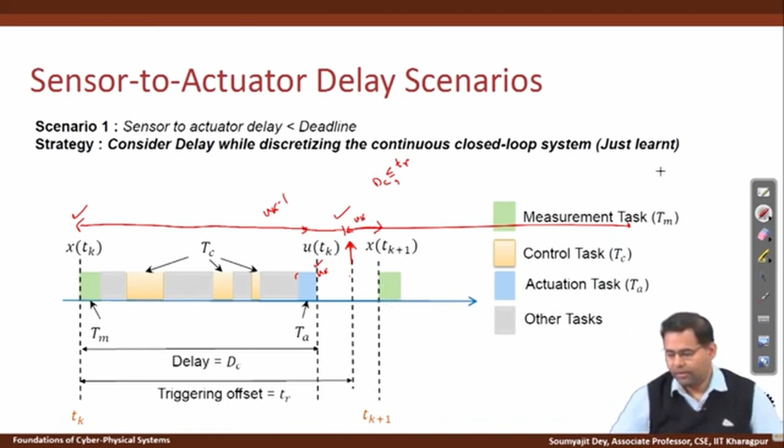Now the question that comes is, what about the other scenario, that is, the sensor to actuation delay that we finally suffer is greater than this deadline. So that means the actuator is supposed to sample the updated control right at this point, where the triggering will happen, right. So the actuator is supposed to sample the updated control, but that's not really available,

because let's say due to delay in the control task or the actuation task, the final update on the control happens here, which is beyond the triggering of the actuator, right. So that means in this case the entire control command updation task is missing its deadline.

So it can happen in various possible ways: that it has been preempted too many times and then it was delayed, and then the actuation task also needs to happen within the deadline. So all these things could not be completed, and before that the actuator actually tried to sample the update, if there is any, on the control task with this offset.

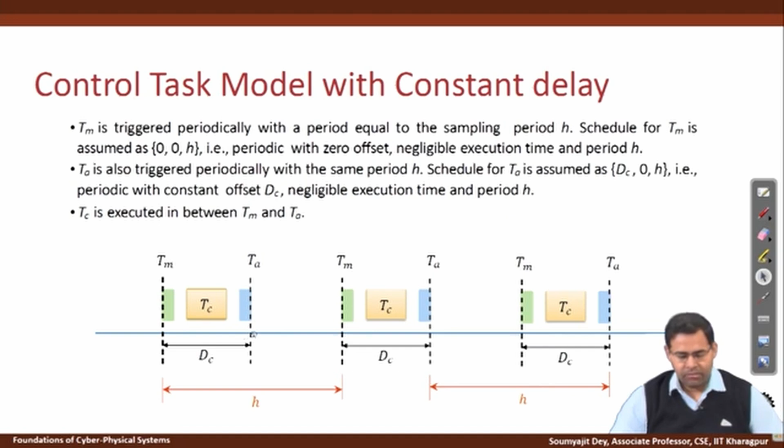So just recalling from our previous picture, this is what we had: here is a measurement, then there is a task actuation happening here, then again measurement and actuation happening here. It is supposed to be like this, and this delay is kept below the triggering interval, but if this delay goes beyond that interval, then what situation will happen? That is what we are talking about here.

So let's understand. This is where the actuator is trying to sample if there is any update on the control, but the overall sensing to actuation delay in this case, due to task preemption or extra computation or data communication delay between the actuator and the controller, or the controller and the bus, there were some delays, due to which this computation got delayed and it was completed beyond this triggering offset. That simply means the actuator is unable to get this update.

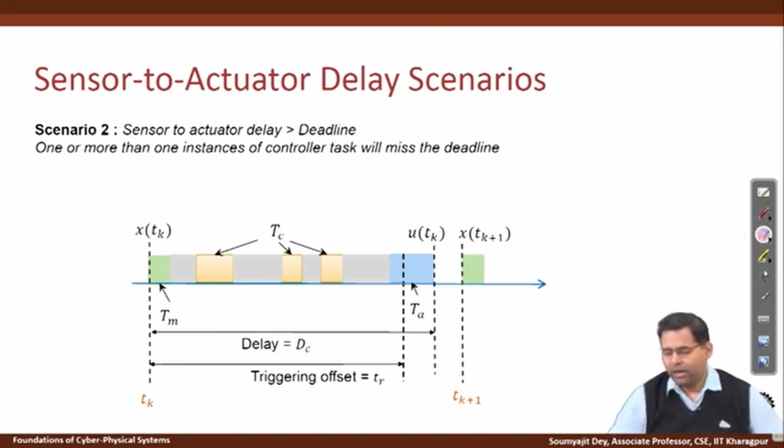So what happens in this scenario? The actuator needs to continue with the older control update only. So you need to have some strategies for what to do here. One strategy is that you kill the control task that is going to miss the deadline. That means the control task execution is here, and it's still not finishing, and the actuator is expecting the update to be here, but the update is still not computed. So right here, when the system observes that there is no update, it can kill the control task execution at that point, and it can just continue with the older value.

And there is also another strategy which is called delayed control, where you can actually delay the actuation itself, but that will depend on the physics, that means how the system is really implemented, whether the actuator is actually allowed to delay updating the control from the task.

So in very simple systems, the actuator simply doesn't wait, because it will be working with a fixed period h, and it will be working with this offset tr. So every time at a fixed period, it is going to sample and figure out whether there is any control update or not, and if there is no update, it will simply continue with the older control update, and the current control task execution will simply be dropped. So that's a kill job strategy.

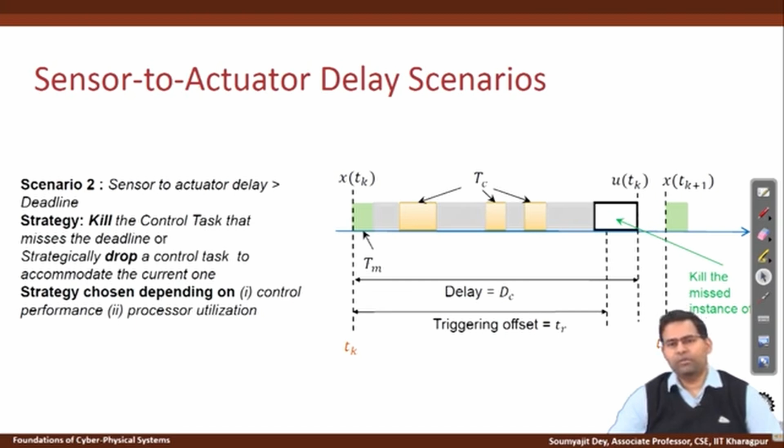So the strategy to be chosen will depend on the performance of the system, how good the control loop is performing with respect to its current sampling and plant model, stability requirement, etc., and also the amount of processor utilization. So as an example, let's consider a situation. We will see how this kill job strategy can affect the control task execution.

So suppose you have two control tasks, T1 and T2, running on a single processor with these periodicities as given. T1 has 0.4, T2 has 0.6, so T1 will have a higher priority, and let's say there is also an authentication task which will always be running with a much smaller periodicity, 0.3, and it is trying to secure the system, basically monitoring the values. And since this has a smaller period, it will run more frequently.

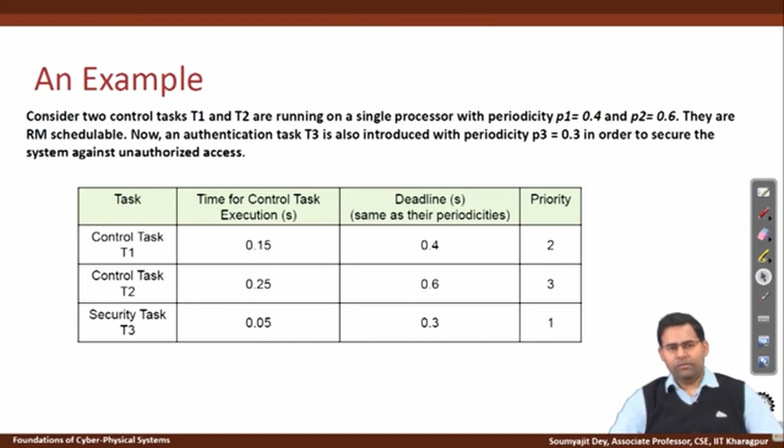Now let's consider that we are looking at RM scheduling. That would mean the priorities will be in the order of frequency of the tasks. The smaller the periodicity, the higher the priority, so this will be the priority order: the security task will have the highest priority, then control task 1, then control task 2. Observe that this task set won't be RM schedulable. To understand why, let's look at the schedule here. Okay.

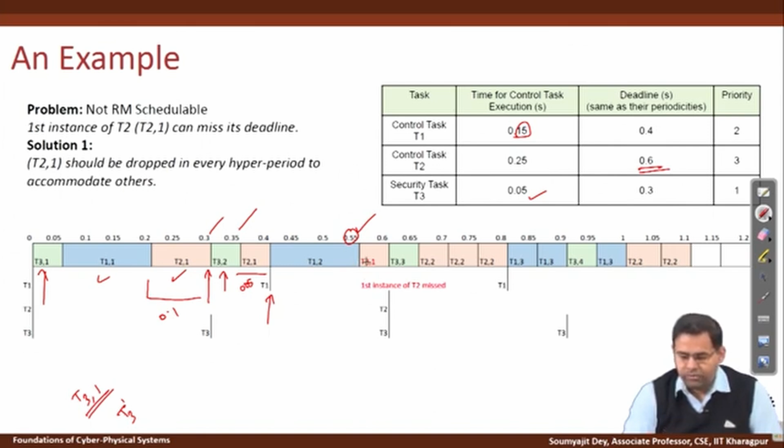So in this time T1's second instance will arrive. So T1's second instance will now fully occupy the CPU for 0.15 seconds. Okay. So it will end somewhere. So T1 second instance starts here, and it is going to take 0.15 seconds, and so it starts at 0.4 and it will end at 0.55. Okay. So then again T2 second instance can start, right, and now T2's second instance will take this much amount of time, and T2's second instance will finish, right.

But if you see for T2, when is it supposed to come again? Here its period and deadline are both 0.6, right. So here T2's second instance is coming, and T3's third instance is coming, right. But could T2's first instance finish? Let's calculate the execution time. Here it was 0.1. So in total we have 0.2 of the job done, but in total it needed 0.25, right. So it doesn't finish. So that means before it finishes it will again be preempted, and by now the deadline is also over, right. So then T2's first instance is going to miss the deadline right here, right.

So fine, then T2's second instance has come and T3's third instance has come, right. So let's say third instance will have a higher priority, and we will execute it right here, and then we will continue with T2's second instance. So first instance has already missed its deadline, no point in continuing with it, right. So T2's second instance continues here, and then T1's third instance is going to come.

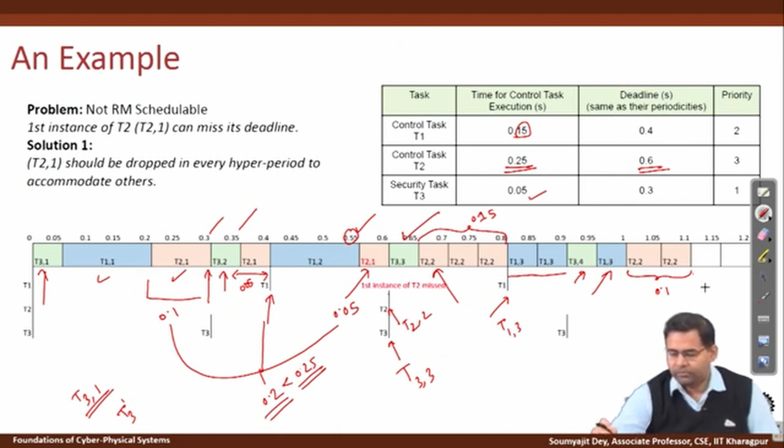So if you see in this period, we have actually drawn this thing up to the hyper period of these three tasks. So that's the hyper period of the task. So we have drawn it up to 1.2, because we understand that if we can schedule these tasks up to the hyper period, then the tasks will be infinitely schedulable for any number of periodic actuations. The tasks will be schedulable, right? So if we see that inside this hyper period, whatever has been the instances of T1 and T3, the tasks with the higher priorities, they could all be scheduled, but T2's first instance could not be scheduled.

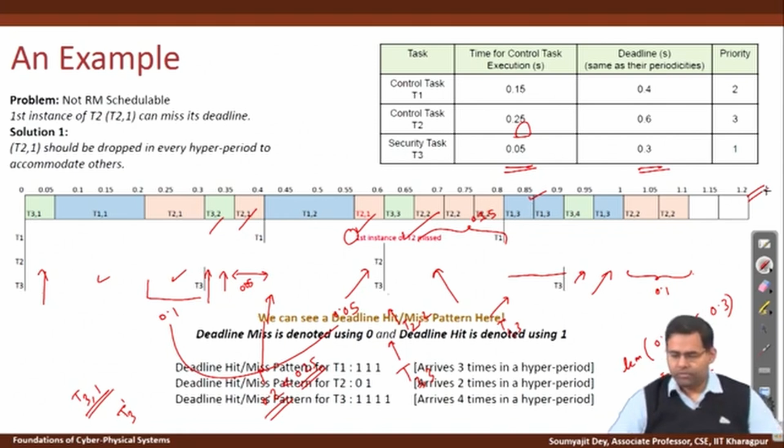Now what does this really mean? That means that, well, you understand that this pattern will continue, like who will be schedulable, who will be not schedulable. This will continue in all the consecutive hyper periods, right? So this means for the task T1, I had how many instances? So inside the hyper period, I had 3 instances. So T1 arrived here, here, and here. All were schedulable. So I can write a deadline hit miss pattern for T1 like this.

A deadline hit, that means the deadline being satisfied, is denoted by a 1, and the deadline being missed, that means the deadline overrun, the execution overran the deadline, is denoted by 0. So then the hit miss pattern for T1 would be this, right?

Now similarly for T2, how many instances are there? 1.2 is the hyper period, 0.6 is the period, so that's 2, right? So for T2 we had one instance here, and we had another instance here. Now as we saw from our analysis, T2 missed its first deadline, and then it met its second deadline. So for T2 the hit miss pattern is 0, 1, right?

And then for T3, how many instances were there? For T3 I had this as well as this, and if we do the hyper period analysis, total hyper period 1.2, the period of T3 is this, so I will indeed have 4 instances, and all were being executed, right? So the pattern is 1 to the power 4. So I can write the patterns are 1 cube, that is 3 ones, the pattern is 0, 1, and the pattern is 1 to the power 4 for T1, T2, and T3.

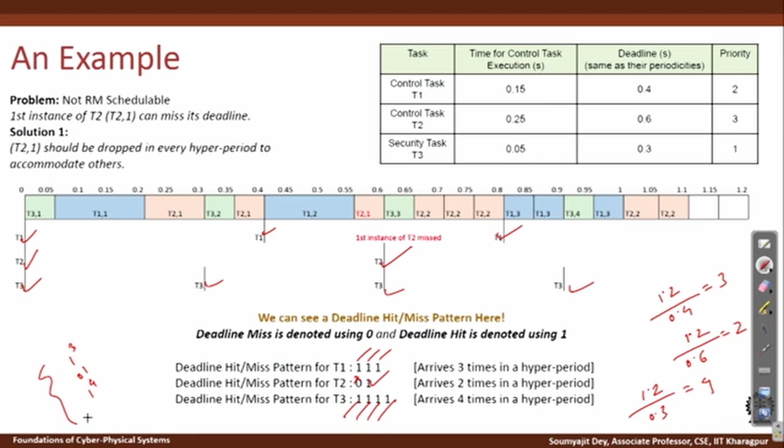So for T1, if I continue in RM, T1 will always meet the period that has been assigned to it corresponding to the delay. Sorry, not the sensor to actuation delay, but the period that has been assigned to it. And also for T2, I can say that, well, this task doesn't really work, because it will always miss its first instance, and it will actually satisfy its second instance. So that's how we are showing it.

Now note one thing: when we are doing this analysis, we are actually ignoring certain things, right? Because we are only considering that the control task's execution can be preempted by other control tasks and security tasks. After that, there may be an actuation task, there may be delays. We are ignoring those things. So we are simply saying that, well, if the control task executes within this time, then it will satisfy whatever is the delay it is supposed to be designed with, right?

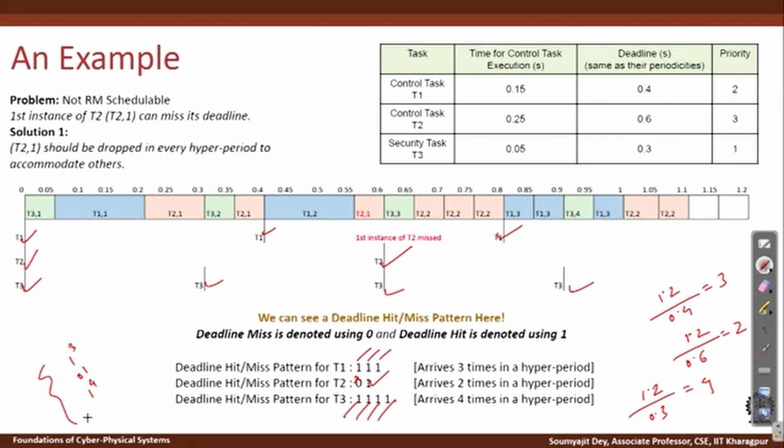And if the control task doesn't meet its deadline here on the CPU, then that means after this deadline immediately there must have been a task triggering, so it has missed that task triggering also. So this is a simplistic method. We can actually create problems with much more detailed models, and that we will see while doing our tutorials and stuff. So here for the time being, let's go on with this simplistic model.

We are just assuming that if the control task is dropped, that means it misses the deadline. That means for the corresponding control action, there has been a deadline overrun, and this control task instance has been killed, and the control update didn't happen. So u(k) works with u(k-1). So that's how simplistically we are continuing here. But I'll just repeat what we really mean here.

What would have actually happened in the architecture would have been this: this task missed its deadline, and due to that we didn't allow it to continue. The reason is that, even if it continued, it will finish at a later time, and then there would be an actuation task which is going to take this input and then write the value in the actuator, and whatever time that will take, before that the actuator's triggering will happen. So that's what we are assuming here, that this deadline is sacrosanct.

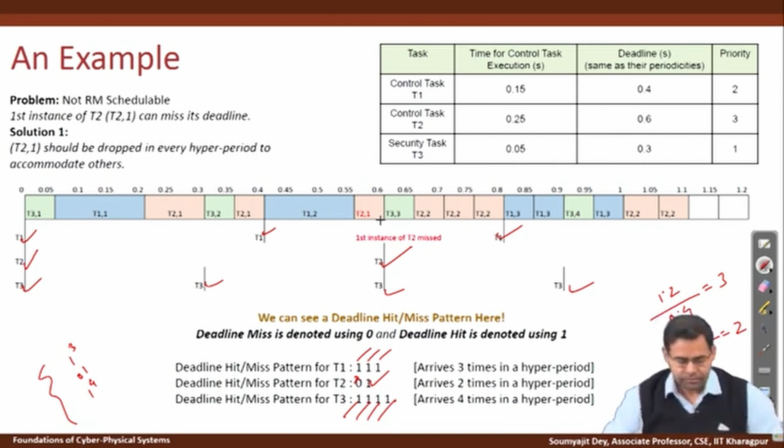If this deadline is missed, then immediately as a consequent event, the actuator triggering will not get this control task update, and hence we must kill the control task whenever it misses the deadline on the processor. So that's how we are modeling it here. So if we continue like this, now the question is, well, what to do about it, right? So let's try to see what can be done.

For example, we see that since the tasks are not RM schedulable, one possible solution would be that we drop this T2's execution. So we drop this T2's first instance execution, or do something about it. If we really see in our analysis that this T21 has missed its deadline, that means there was no point in giving it the CPU at all, right? Because eventually it got killed in this way.

And now let's see what other situations can be. The other situations can be, let's say, like this. Suppose I do not want this to happen, that task 2 should not miss the deadline. But then we have to do something about it, right? If I don't want task 2 to miss the deadline, the only thing maybe that I can do is drop some other instance of some other task actuation.

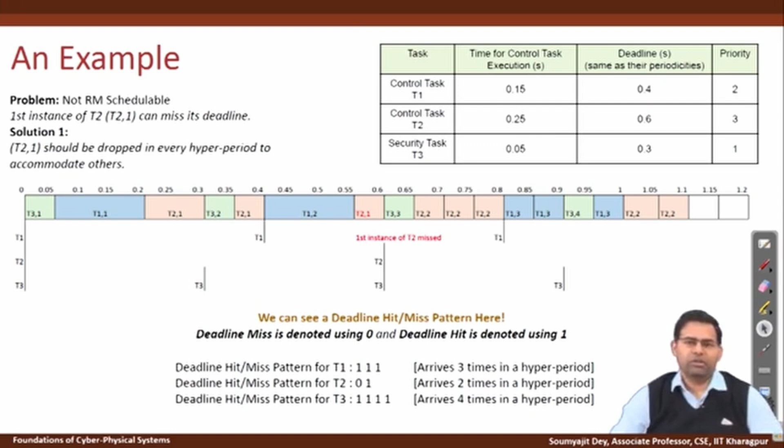Then what to do? Let's look for some other task. Let's say for T1, I get the feedback that if you drop 33% or something like that of the control actuations, it is fine. So let's see, can I intentionally drop certain instances of T1? What does it mean by dropping an instance of T1? It means I do not go by simple periodic scheduling. Instead of dispatching all instances of the task, I dispatch as per these kinds of patterns.

So for T1, I figure out that maybe giving 30% or 40% drops, that means not giving the control updates, is fine, because the plant can withstand that and still give me the required performance. So I will nicely choose which instances of T1 I can drop, and those empty slots of the processor I can give to T2, so that T2 can execute with all its instances. So let's suppose we decide something like this, and now let's see how the execution happens.

Suppose I decide that I will drop the second instance of T1, T12, in every hyper period. Now it's not that I am running T1 and it is going to miss its deadline; that's not going to happen, because it's an RM strategy. What I will do is, when I dispatch tasks T1, T2 and T3, I will not dispatch all their instances. I will judiciously choose and dispatch following these pre-designed hit-miss patterns, or let's call them task execution patterns.

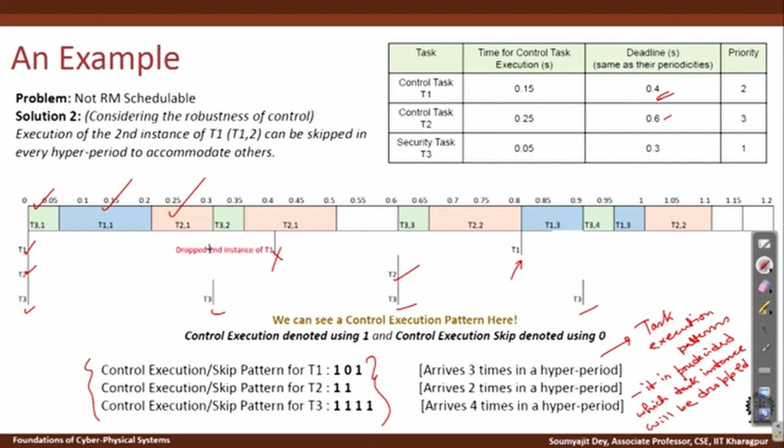So here T3 will execute highest priority, then T1's first instance executes, then T2's first instance executes as per the priority, because the RM doesn't know, right, what we are dispatching or not. Whatever you are dispatching, based on that RM is deciding based on the priorities, right? And then T3's second instance and then T2's first instance will continue here, and here you see there is a nice blank spot because now I have not dispatched T1, so T1 is not causing any contention here, okay.

T1 is not causing any contention to T21, so T21 doesn't need to drop here and T21 can continue up to this. So here T21 has executed for 0.1 second, and here T21 could execute for 0.15 second, and T21 completes its execution of 0.25, so it finishes here, right. Again here T2's second instance will come, T3's third instance will come, which will execute, then second instance starts. Now T1's instance will come, it will execute, T3's fourth instance will preempt it, T1's third instance will resume and finish, and then T2's second instance will resume and finish.

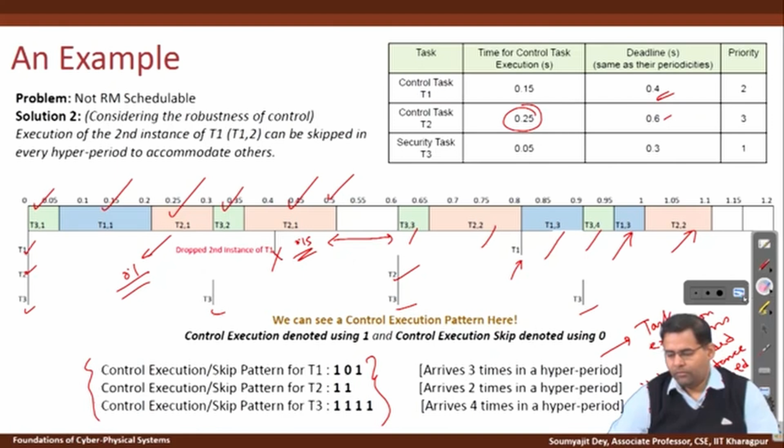So all good. Only what we did is to make this task set schedulable, we took a judicious decision that, well, I will intentionally drop T1's second instance so that things work. Now it need not be the only solution, there could have been another solution also. I mean, you can actually figure out which are the solutions by doing schedulability tests. So suppose instead of dropping the second, you could have also dropped T1's first instance, so that the pattern is this, right.

So then what will happen is you drop T1's first instance, then you don't have arrival of T1 here, you have arrivals of T2 and T3. T3 will execute, then immediately T2 will get the CPU and it will execute for its desired time. Then T3's second instance will come, and then T1's second instance, which you have not dropped, will come and it will occupy the CPU. So you see that here again all these tasks are schedulable with just T1's first instance dropped. So these are important design decisions.

Now what is the advantage of this kind of aperiodic scheduling? The advantage is that you don't need to reduce the control loop's periodicity, because if you reduce the control loop's periodicity, then you are practically dropping more instances of actuation, update and sampling you could have done. So you are doing a fine-grained scheduling of the controllers, and you are judiciously choosing which instances of the task to drop, and at the same time you are not reducing the period as we do typically in periodic scheduling of control loops, okay.

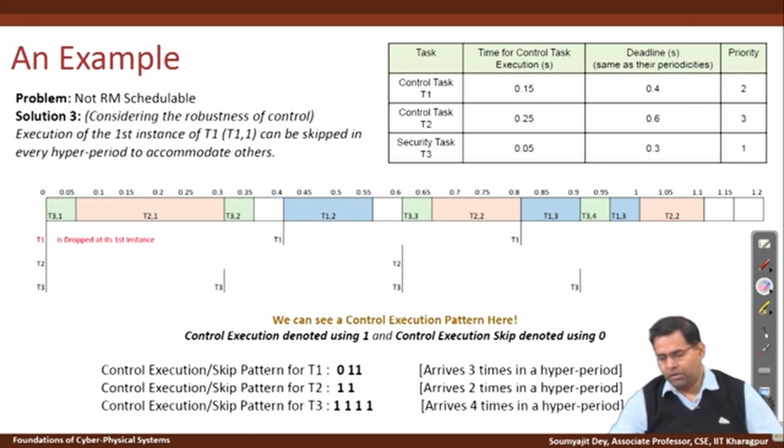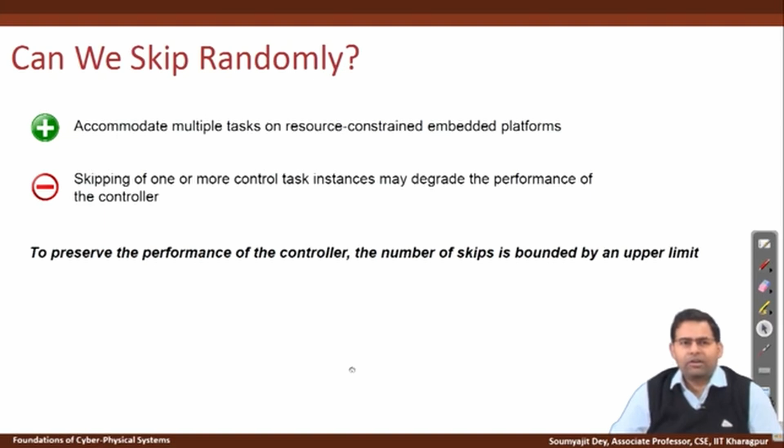Now here we have a very important question: can we just choose and skip anything? Because then the control engineer will be very angry with you that you cannot really do that. There is a mathematical guarantee to be maintained, etc. So you cannot ad hoc decide that I will skip this or this. There has to be a rigorous mathematical guarantee for that, right? So the number of skips is typically bounded by an upper limit.

So let's say you model this as a switched control system. Whenever the switch is closed, the control input is computed and transmitted to the plant. When the switch is open, the control input is neither computed nor transmitted to the plant. That means the plant will simply continue with its older control input. Let's say this switching rate is R. So R is a rate, and 1 minus R is what we call the drop rate.

Let's say there are 100 consecutive iterations. R is the execution rate, let that be 0.9. Then the drop rate is 0.1. So you are saying that out of every 100 consecutive control actions on the plant, 10 of them will be dropped. Now, there exists rigorous theory which says what is the upper bound of these drop rates, or what is the lower bound of these execution rates.

That is the minimum number of times you must execute. By the way, note that this is a rate, not a value. That means if you have the rate as R, then out of n consecutive cycles of execution, in n times R cycles the control must really be updated. So R is basically a value between 0 and 1 here.

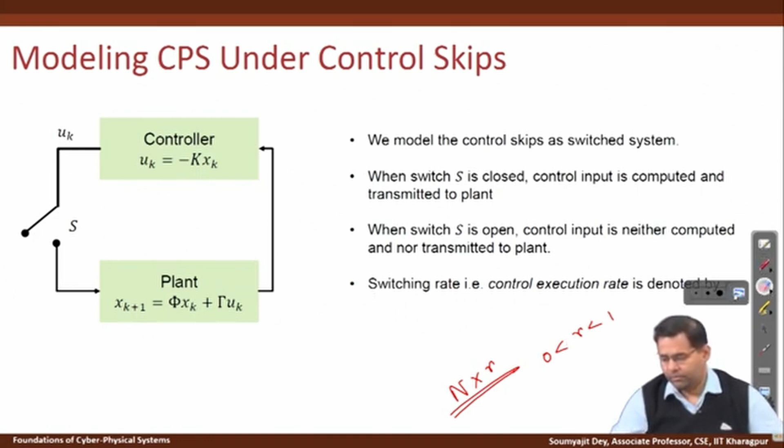There are several theorems on this in the control theory literature. We will just show one of the simpler and popular ones, based on Branicky's paper from around this time. The reference is here. What it says is: suppose the closed loop is stable without any of these drops happening, and you have the plant's model as phi and gamma, and the controller is K, so the closed loop is given by phi minus gamma K. This is in the discrete domain.

In the discrete domain, we can say that this matrix is Schur, that means it is Schur stable: all the eigenvalues of this closed-loop system matrix are within the unit circle. So what does the theorem state? The theorem states that if the open loop system, that is, the system without the control, is marginally stable, then the system is exponentially stable for all switchings, all execution rates.

What does it mean? Suppose even without the control, the system is marginally stable. That means you need not really compute and execute. You don't really care, right? Because whatever your control execution rate is, whether you are always able to meet the deadline of the control task or not that frequently, it doesn't matter. The system will be exponentially stable. That's what the theorem says.

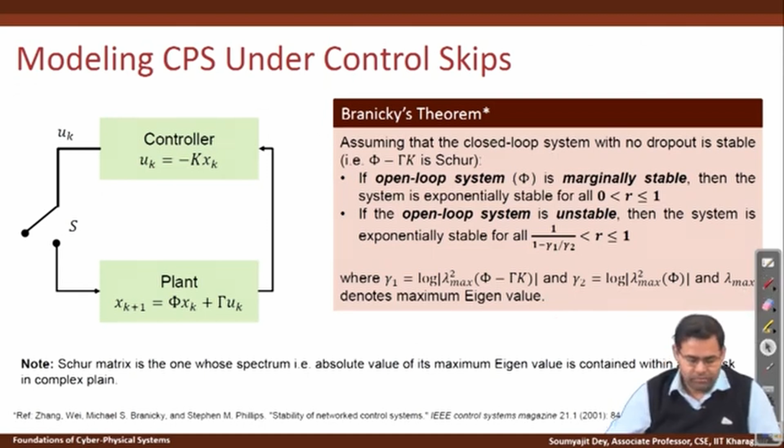So just one example. Suppose you have our old favorite trajectory control system. System states are the deviation from trajectory and velocity. The output is the deviation and the control input is the acceleration. So for this the open loop lambda max is 1. So that means the system is marginally stable in the open loop. So the closed loop system is stable with any execution rate, even if the loop doesn't close.

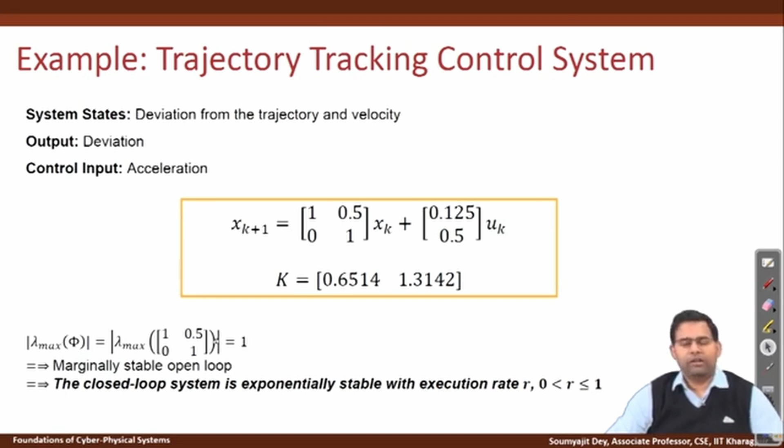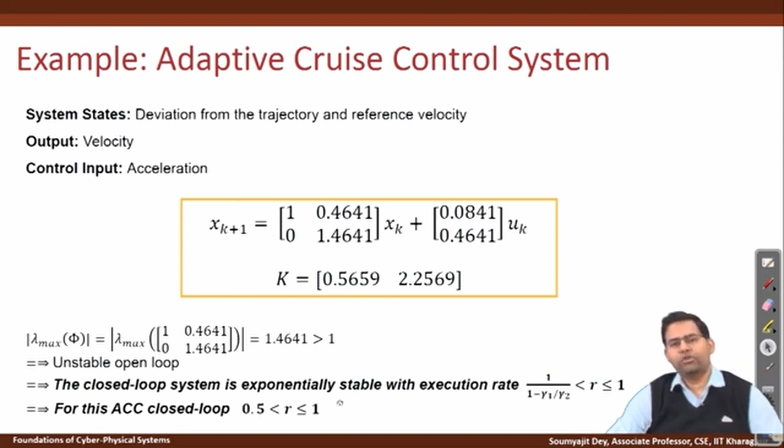But now let's take a system with a set of different parameters. It is an unstable open loop. For this system matrix, you see that the lambda max is greater than 1. So here you can actually design the R based on these maximum eigenvalues of the open loop and the closed loop, and in this case this will evaluate to 0.5. So the minimum rate that you need to maintain is completing half of those control executions. So you see this really comes out nicely.

So there will be jerks in the ACC, the vehicle's movement, but eventually the vehicle will kind of hover around the target speed. There will be disturbances, there will be jerks, but it will hover around, not smoothly, but it will. So it will not be unstable.

But see, the moment the rate goes below 50%, that means you are not closing the loop fast enough, you are missing too many control updates, it's completely unstable. So that's the knowledge we wanted to impart using a real example here. So I hope with this you have got enough idea about performance and scheduling.

So this is a very important point. We spent a lot of time here. The reason is this is really what we should mean by cyber physical systems. You have knowledge from embedded and real-time systems and scheduling and timing analysis. You have knowledge from control theory, and you would like to apply them together to design the final implementation. So that's really how CPS systems need to be studied and designed.